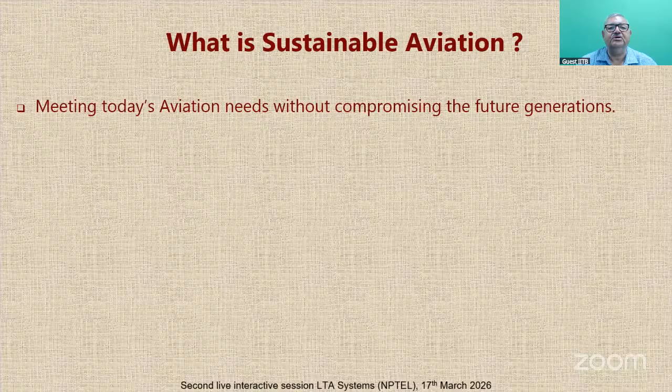In other words, sustainable aviation is achieved by aiming towards a zero carbon footprint, as mentioned by Walker et al. in 2009. So the road to sustainable aviation basically means the road towards zero carbon footprint.

However, zero carbon footprint is very far away. The initial goals in the country were 2035, but they have been pushed now to 2050. So globally, the aim is to obtain zero carbon footprint around 24 years from now.

Now, how do we do this? We focus on reducing certain aspects. One is the carbon emissions which are being generated, we try to reduce them. We try to move more and more towards renewable resources, and we also try to reduce the noise pollution.

By the way, noise pollution is a big problem, and it is coming in the way of sustainable aviation because lots and lots of communities, especially near the airports, are becoming very upset because they are not able to get peaceful sleep, or they feel terribly disturbed because of the increased aviation operations.

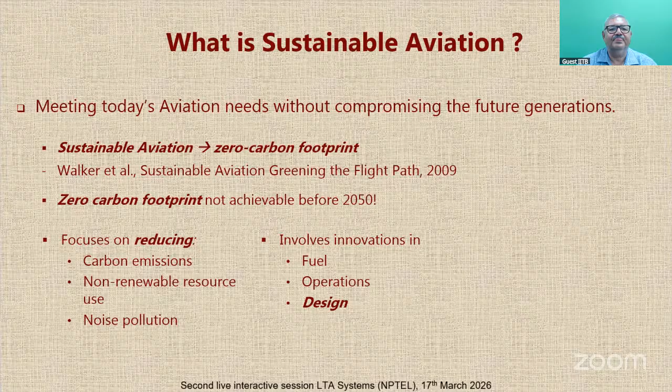Let's understand what is meant by buoyancy engineering. We are proposing that buoyancy engineering can be used for sustainable aviation. Buoyancy engineering can be phrased as creative problem solving by exploiting buoyancy for lift generation.

The genesis of buoyancy engineering is the famous, well-known Archimedes principle, which acts on a body which is partially or fully submerged in a fluid. It says that the upward force of buoyancy acting on the body submerged in the fluid will be equal to the weight of the fluid displaced.

This particular principle is also applicable to a fluid within a fluid. For example, when we boil water in the morning to have a cup of tea or coffee, after we generate heat, the air which is condensed inside the water will start becoming vapor.

And since the buoyancy of vapor, or the density of the vapor, is less than that of the fluid, buoyancy force will make it go up in the form of bubbles. So the bubbles that we create in boiling water are because of the application of Archimedes principle on a fluid such as air inside a fluid such as water.

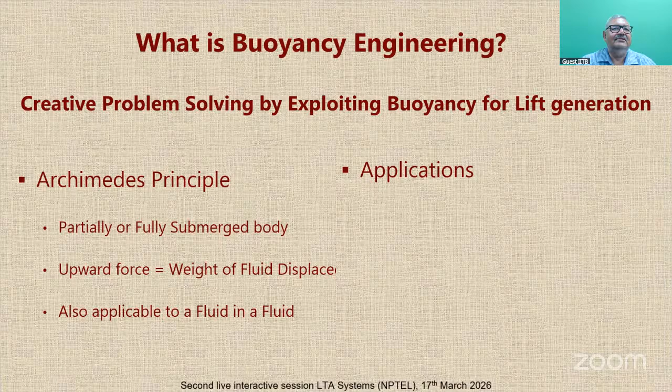Now one can apply Archimedes principle to use buoyancy engineering for beneficial applications such as hot air balloons. We are all aware how hot air balloons work. In fact, in the last session, I discussed the flameless indoor hot air balloon exercise that we do. Hot air balloons are a very well established application of Archimedes principle or buoyancy.

We are all aware about submarines also - these use buoyancy of air on bodies submerged in water. And finally, we have what is called airships, and that is what we will discuss today.

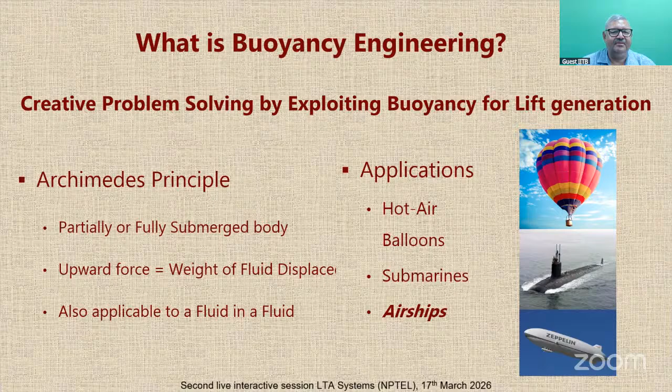The students of this course definitely know about airships a lot because we have already reached the second month of the 3-month course. So I'm sure by now you know about airships, what they can do, what they cannot do, what are their merits and demerits. So we will look now at how airships can be helpful in sustainable aviation for the future.

One application of airships, which has been touted as the best application of LTA systems in the coming years, is to use them for transporting large size and heavy cargo. But before we go there, we should first try to understand how cargo is transported today.

So today, you have an option of transporting cargo either from a ship, a train, a truck, or an airplane. These are the options available today for transporting cargo.

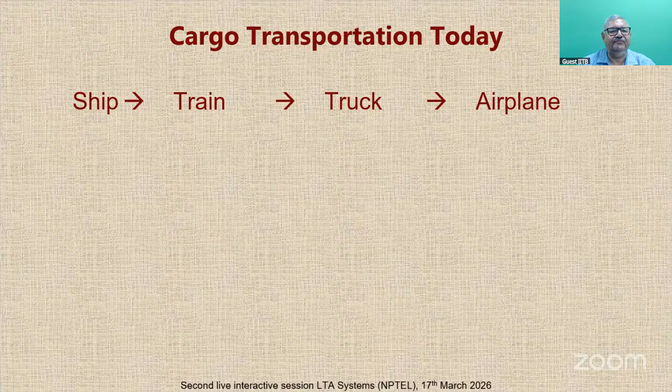Now, what does this flow represent? Basically, if you look at a plot between the cost of transporting cargo in terms of dollars per ton mile, a very commonly used unit to talk about transportation cost, so cost per ton of material carried per mile of distance, if you plot that versus the vehicle speed in knots or nautical miles per hour...

We can see in this image that the ship is the slowest but the least expensive option. The airplane is the fastest but also the most expensive option. Broadly speaking, the cost of transporting by airplane per ton per mile is 60 times more than that of a ship.

For a truck, it is 25 times approximately. And for a train, although the speed is much larger, the cost is relatively less, about $3 to $4 per ton per mile. But undoubtedly, ships are the least expensive, and that's why all over the world, heavy cargo is transported only using shipping lanes.

The current scenario in the world is such that we are in the middle of several wars. And in the Strait of Hormuz, as you all know, many ships are stuck with petroleum products, including those from our country. So we were fortunate that 2 of these ships were allowed to sail through the Strait of Hormuz.

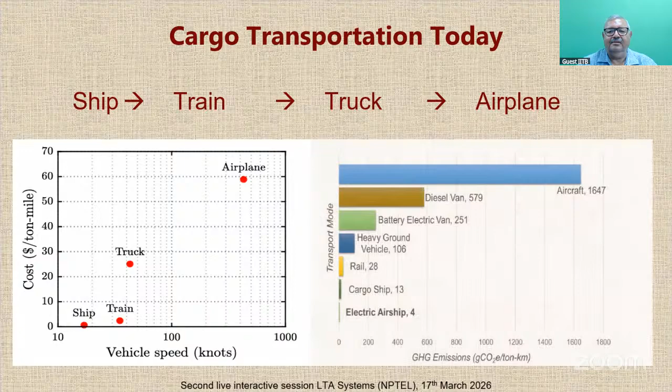On the other hand, if you also look at comparison of the transportation mode with the greenhouse gas emissions, that is grams of CO2 or CO2 equivalent produced per ton per kilometer, we will notice that aircraft has got a very, very polluting contribution of close to 1647 grams of CO2 equivalent per ton kilometer, as compared to a cargo ship which is more than 100 times less, about 13.

Rail is almost double of the ships. Heavy ground vehicles, such as the trucks which are used to transport cargo, is about 106. If we use a diesel van, it is around 580, but if you use an electrical van with battery, assuming that the battery is produced using environmentally friendly means, then it is 251.

But look at the bottom. If you operate an airship, and that too with electrical propulsion, it's 1/3 of the ship. So from the point of view of the greenhouse gas emissions, electric airship is 400 times better than an aircraft, 400 times, and even 1/3 of the cargo ship.

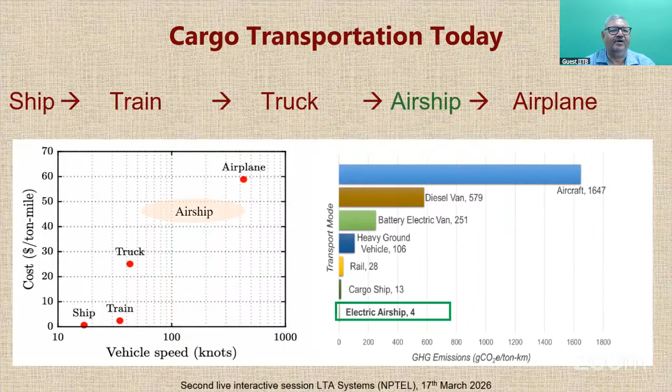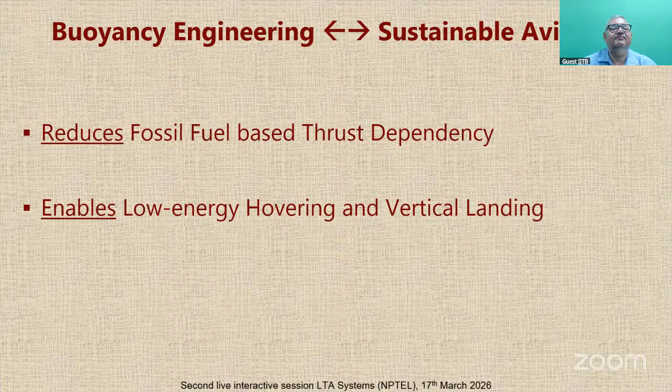So buoyancy engineering can directly be useful for sustainable aviation because of three factors. The first is it reduces the fossil fuel-based thrust dependency. Secondly, it enables low energy hovering and vertical landing, which is a unique feature of airships because unlike aircraft, unless they are fitted with a very specific kind of power plant, it is very difficult to provide facility for hovering and vertical landing. But airships can do hovering and vertical landing with lesser energy requirements.

And also, buoyancy engineering supports quiet and low emission air transportation, because I would say quieter and lower emission since they also do some emissions. I would just say it's quieter as well as lower emissions. And if we use electrical propulsion systems or hydrogen-based propulsion systems, then we can say that it is no emission or zero emission also.

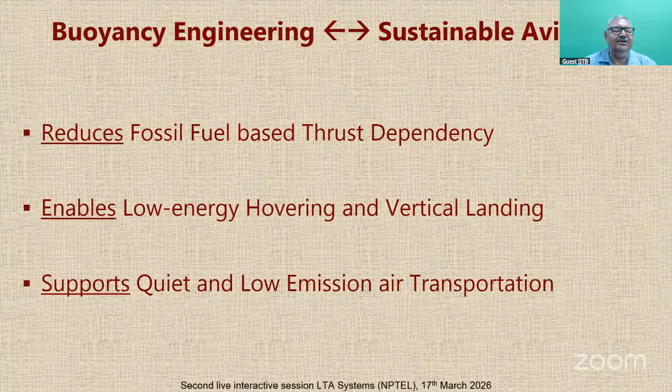But we are very far away from actually achieving a large fraction of cargo transportation using airships. In fact, right now there are no cargo airships commercially operating. They are all being proposed and they will come very soon. But they are on the road and you will see them at least, hopefully, in my lifetime.

Now, what are the applications of sustainable LTA systems? One could use them for aerial surveillance and monitoring, which is the primary use of LTA systems all over the world, and it will continue to be.

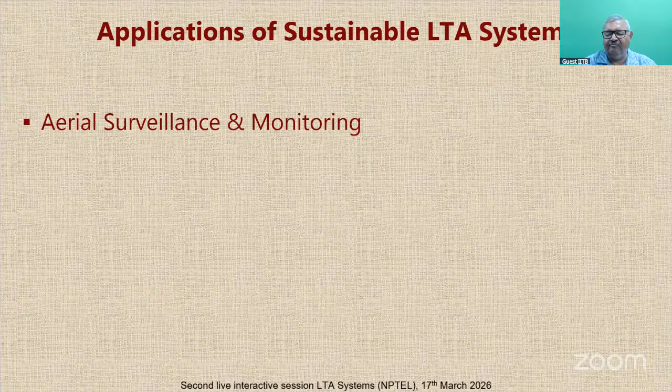For this application, if we use aircraft or helicopters or any other mode of transportation, they are very fuel inefficient. One could use LTA systems as airborne communications relays, both stationary aerostats as well as mobile airships. You can mount your communication equipment on these systems and make them stay at a place at high altitude.

Or move around at high altitude, providing a facility for airborne relay of communications. As I mentioned, you can use it for cargo transport in remote areas because at both places you don't require to build an airport or provide a runway or any other special facility. Airships can operate from open fields, so for a point-to-point transportation system, they will be very good.

Of course, we require some storage facility for the large size envelope of the airship in some kind of hangar, at least at one of the two locations or at the primary storage location. But there are solutions available even for keeping airships out in the open by anchoring them safely to the ground.

And by transporting the loads acting on them onto large pieces of fabric which are wound over the envelope, if possible. So there are solutions available. In fact, there are also inflatable hangars available now, which can be set up at a particular site temporarily and removed and relocated as the airship is also moved.

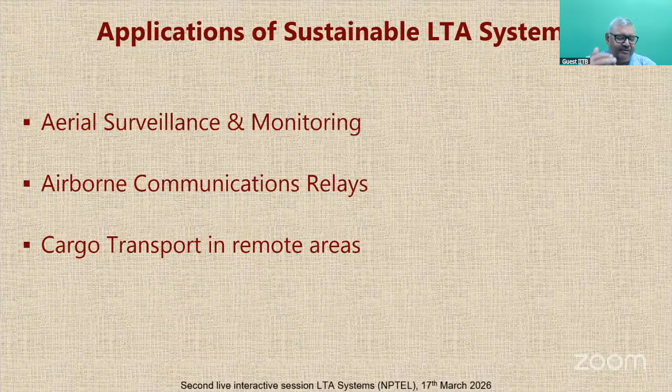Airships can also be used for tourism and short-haul passenger travel. This is the current application for which we see passenger carrying airships. Otherwise, they are mostly used for surveillance.

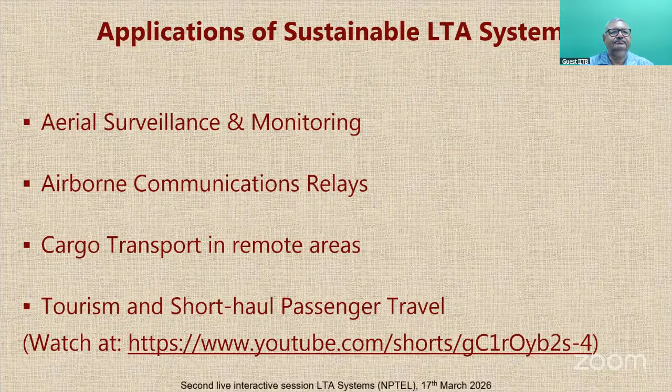Moving ahead, let us see how airships can be used for transporting cargo in remote areas. There are some concepts which have already been realized, and some concepts which are currently under a proposal stage. So first we will show you images of two concepts.

One of them, on the bottom, is called the Flying Whales. This is the concept which is under advanced stages of investigation, and if all goes well, we should be able to see them operating very soon. The one on the top is the Atlant concept of Atlas LTA, also in advanced stages of research.

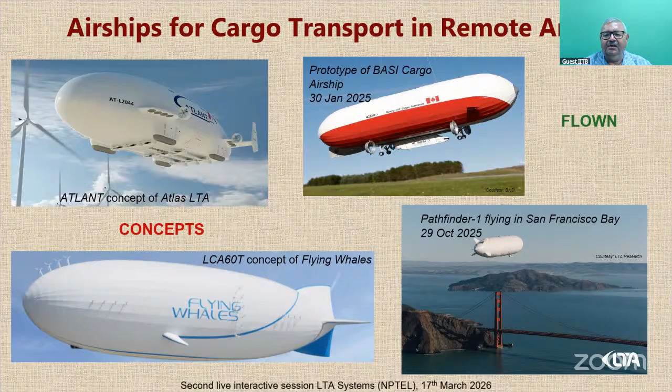On the right hand side, there are two concept prototypes. Or I should say, these are prototypes of concepts which have successfully flown. So the ones on the left are under realization, while the one on the right has already been flown.

The most interesting and promising among these is the one on the bottom, from the company called LTA Research. It's the Pathfinder 1, which you can see in this picture flying in San Francisco Bay. This trial was held last year, and every week we get updates on LinkedIn about their new developments and progress.

I'm very happy to share that some of my ex-students are working in this particular company and contributing to this research and development project. Right now it can only lift 1.5 tons of cargo because it's a prototype, but they are planning to upgrade it to around 20 tons of cargo, or maybe more, at a later stage.

The one on the top is a prototype of a cargo airship developed by my very good friend, Professor Barry Prentice, from the University of Manitoba in Canada. I'm told, unfortunately, that his prototype was damaged in a snowstorm, but it has successfully flown. This is an image from just January last year. The previous prototype he had developed was lost in a snowstorm, but this one flew successfully.

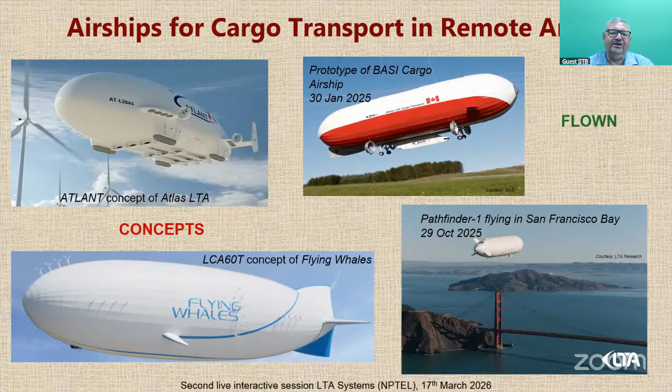So we have to distinguish that the airships being proposed for carrying cargo are probably going to be rigid airships. There are various airship configurations - rigid, non-rigid, semi-rigid. The rigid airship is most amenable for heavyweight cargo transportation. Rigid means it has a complete internal structural framework which is stiff - it could be metallic or composite - but the shape is held by this stiff internal structure.

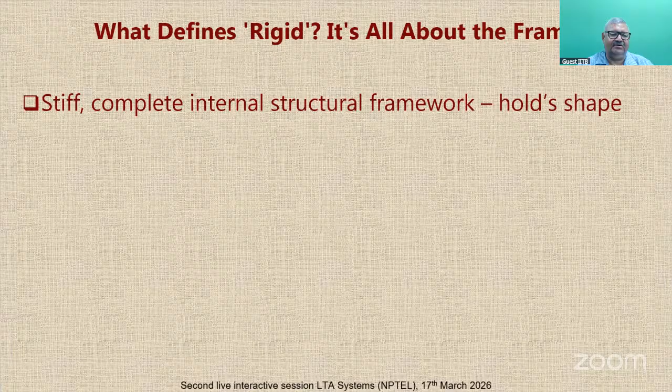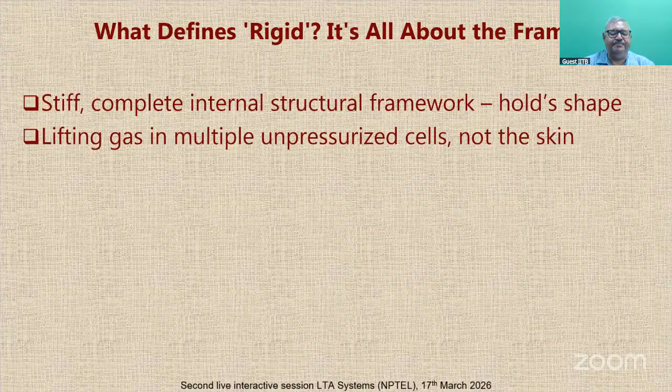Now, the lifting gas in a rigid airship is not put in one big compartment, but placed in various unpressurized cells between the various frames of the rigid airship. So the lifting gas does not come in contact with the skin of the airship - it has a separate gas bag in which the lifting gas is placed.

Here is an example of the famous airship called Hindenburg. Most people, when they hear about Hindenburg, remember that video of it catching fire at the rear side while coming into land. But people forget that several successful flights of Hindenburg across the Atlantic Ocean - more than 10 flights - were conducted successfully. I think we do a disservice to history if we consider Hindenburg a disaster or an unsuccessful airship. It is one of the most successful airships of all time. It was the last of the great airships.

Before it was lost, it had transported 2,800 passengers and had flown more than 186,000 miles successfully. You can see these gas bags which are located within the frames of the rigid structure.

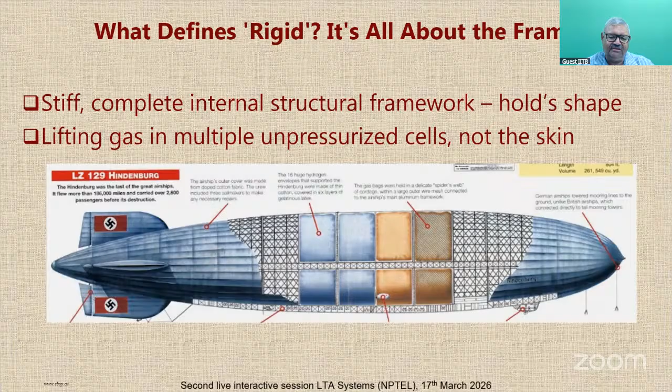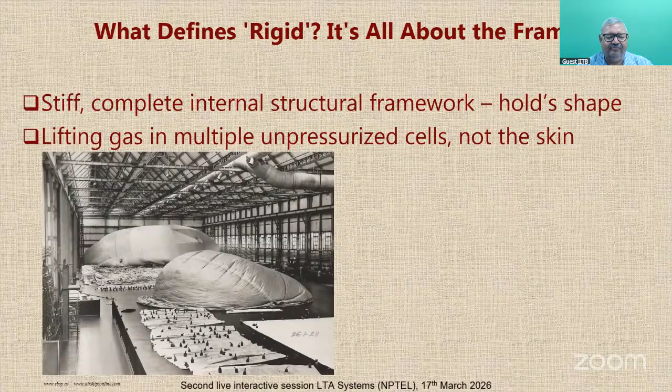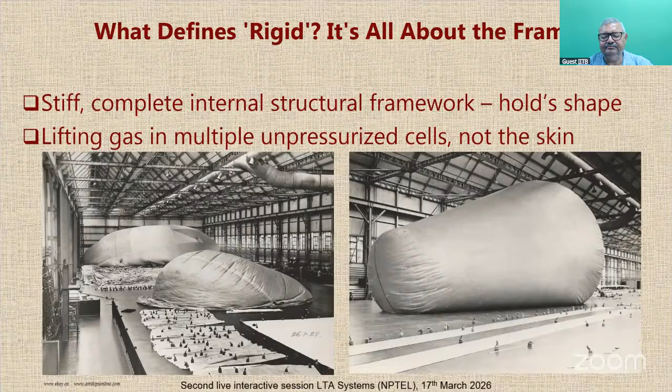The question that comes to mind is, why rigid cargo airships? Why not look at semi-rigid, which is already proven and certified? Or why not non-rigids, which are much lighter? The internal framework is very important because the loads coming on these airships will be very, very high.

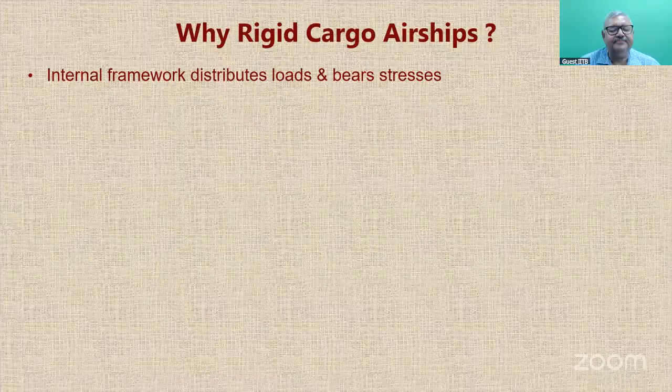We are looking at cargo airships with 20 tons, 60 tons, 100 tons payload capacity. So the load on the structure, and the stresses generated, can be very high. A rigid framework is useful because it can distribute and bear these stresses. Also, when carrying heavy and concentrated weights, a rigid structure gives higher redundancy, and it can withstand the vagaries of weather much better because of its inherent rigid structure.

Another important point is the scaling advantage. In lighter-than-air systems, bigger is always better. That's because when you increase the dimension of any body by 2 times, such as a cube, if you double the length of the cube, you get 8 times the volume, and volume is what gives you buoyancy. This is called the square cube law, where improvements multiply exponentially with larger sizes.

Because of the square cube law, you get much higher lift compared to weight when you make the airship larger. A rigid cargo airship also helps lower LTA gas leakage because the skin is not directly connected to the lifting gas. The lifting gas is inside the gas bags, and the structural envelope is separate.

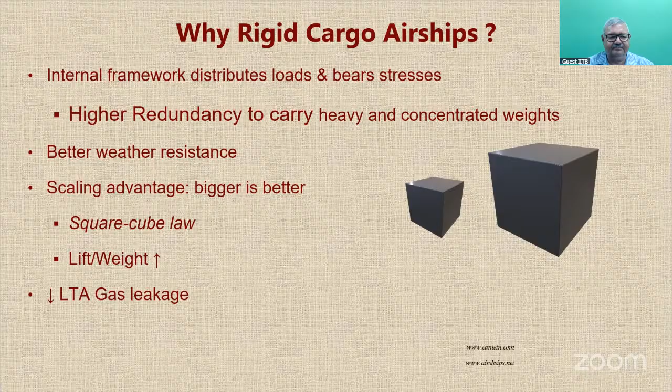Now, there are many modern innovations which have paved the way for development of much more rigid and capable airships. Earlier, we used only metallic structure for the skeleton of the airship, but now we can use carbon fiber composites, which have a very high strength to weight ratio.

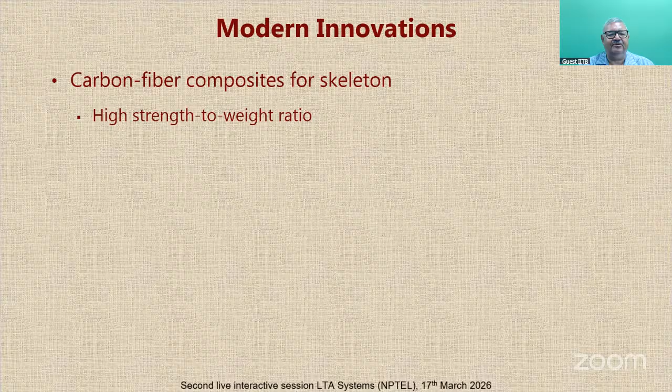Technological advancements in fabric technology have allowed us to make thin and strong gas-tight fabrics, which are polyester based. There are two main types: laminated and coated.

In laminated fabrics, you take two fabrics and laminate them together, such as Tedlar and Mylar, both proprietary items from DuPont. If you laminate them, one is very good in strength, the other is very good in gas retention.

Or you could use a nylon-based strength load-carrying membrane and coat it on both sides, one side with polyurethane and one side with polycarbonate. One side allows better gas retention, while the other side, exposed to the atmosphere, will have better resistance to atmospheric aging.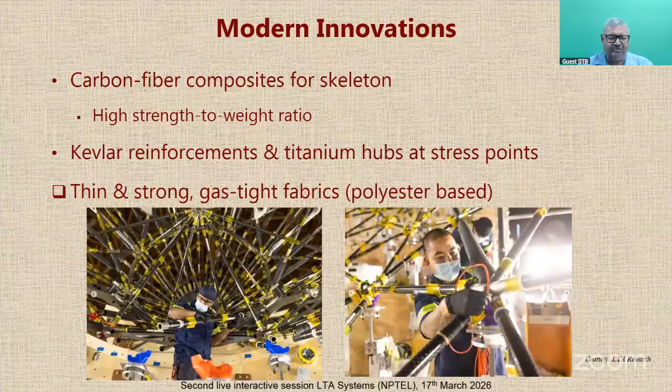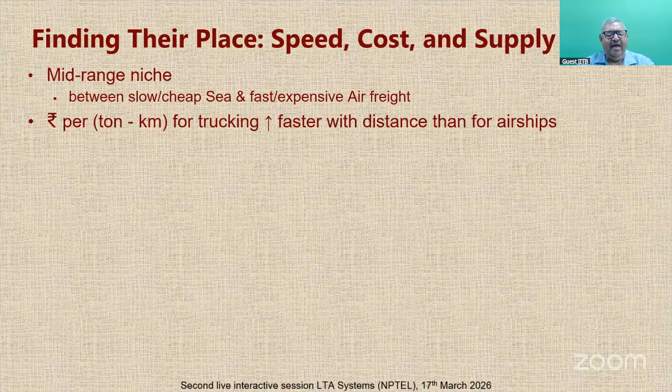Let us see how these cargo airships find their place in terms of speed, cost, and supply chains. Airships occupy a mid-range niche between slow and cheap sea freight and fast and expensive air freight. If you look at the cost in rupees per ton kilometer for trucking, it increases faster with distance, so trucking cost is more sensitive to distance compared to airships.

Airships also allow you to depend less on infrastructure. For example, you don't need a road. So these are some numbers for the cost per ton kilometer for various modes of transport at various speeds, along with what infrastructure is needed and how much time is taken.

If shipping can take 7 to 10 days for transatlantic transportation, rail and truck will not be able to do it within 3 days either. And ships, of course, are possible, but you need water.

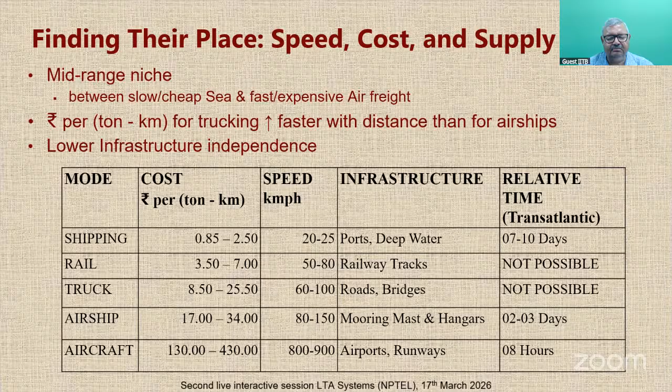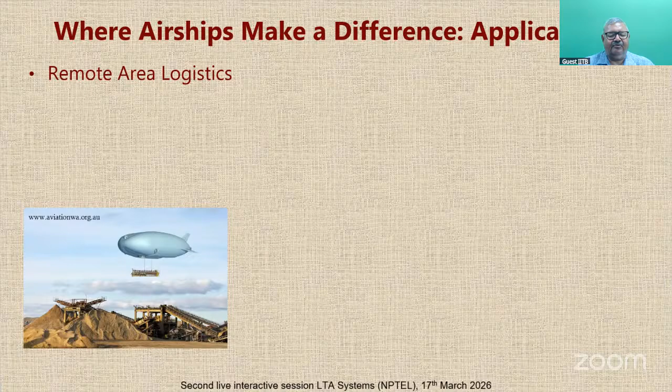So what difference do airships make? One is remote areas where you don't have other modes of transport, no roads, no development, but you want to explore and transport equipment. Those could be used by companies for their logistics.

In very cold areas, it is difficult to transport items required by the military, so the logistics of the military can be handled by airships.

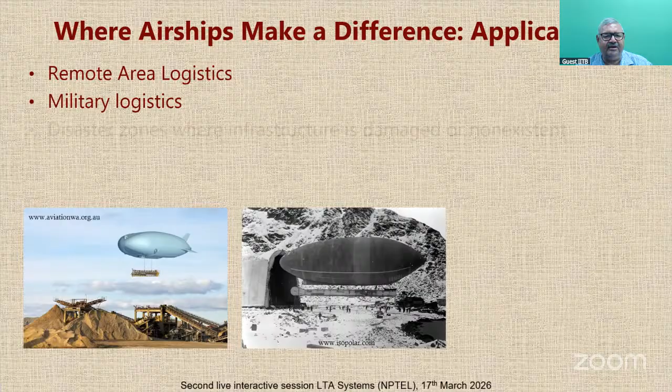We can also look at oversized loads, such as turbine blades, which are more than 70 meters in length. How do you plan to carry them on the road? You would cause road transportation disturbance.

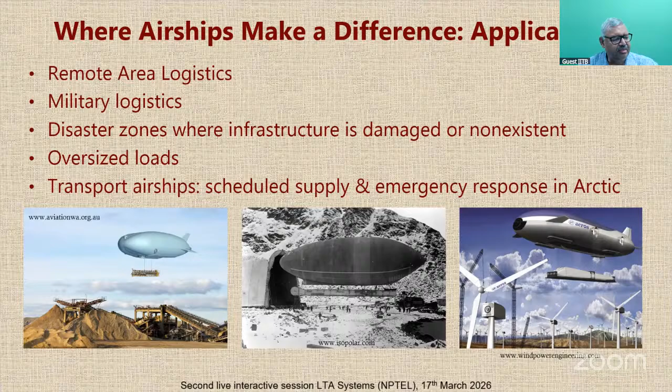Also, if you don't have infrastructure or if it is damaged, it will be very difficult to service disaster zones by other modes of transport. Transport airships can also be used for scheduled supply and emergency response in situations in the Arctic Ocean, where it will be difficult to mobilize aircraft.

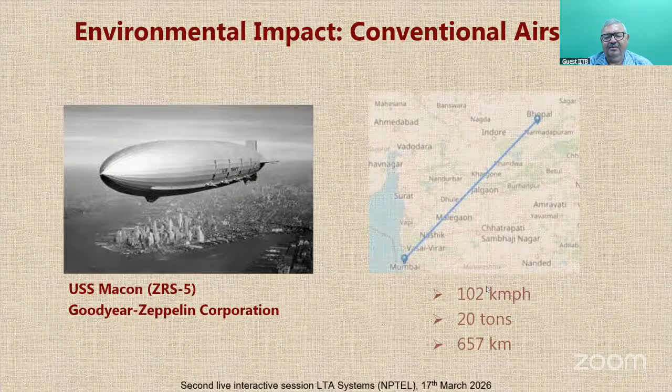Now let's look at the environmental impact of a conventional airship. Since we don't have any modern rigid cargo airships, we've taken data from an old existing airship, the USS Macon from the Goodyear Zeppelin Corporation, ZRS-5. You can see it can travel from, say, Mumbai to Bhopal in a straight line at about 102 kilometers per hour with 20 tons of cargo, covering a distance of 657 kilometers.

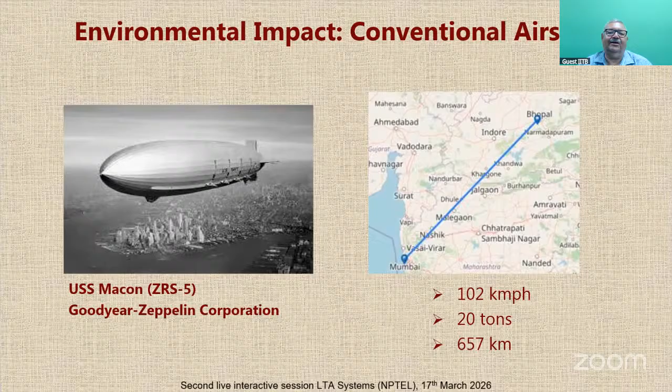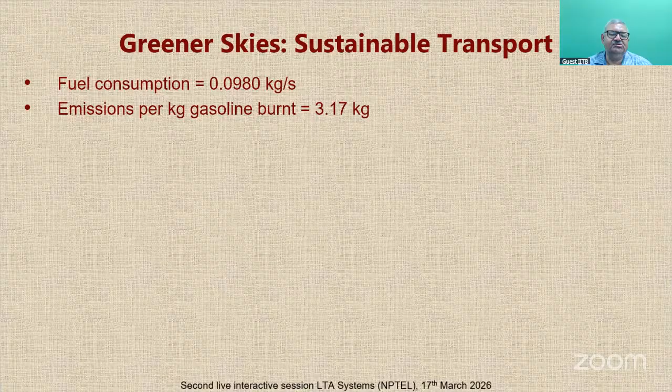Now let us see how sustainable transport can result in greener skies. If you look at the airship, fuel consumption is very low, 0.098 kgs per second, and emissions per kg will be only 3.17 kg. So the same graph comes back again with more detailed information.

We have done two studies and made one prototype. The two studies are shown in the long rectangle: the Macon with a modern diesel engine, and Macon. You can see that cargo ships and rails are the lowest, and aircraft is the highest.

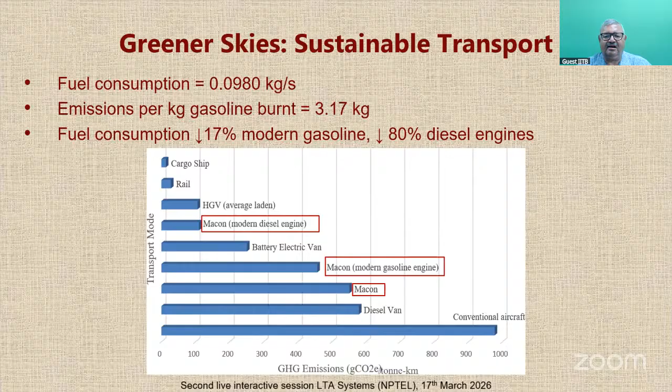Now, what happens if you bring in an electrical airship? You get improvements across the board. As photovoltaic technology is improving, we are now looking at 8.1 on our campus. 11.1 is actually a very large value, and already we are looking at 8 or so.

Low carbon hydrogen is also another way of minimizing, but not eliminating, emissions. There is also something like route selection. Between Barcelona and Valencia, we have chosen some route and transported some items.

But the question here is that none of the existing models or codes are actually very good for this particular application. This I've already shown you, so I don't want to repeat. I just want to highlight that an electric airship will be about 400 times less polluting than an aircraft.

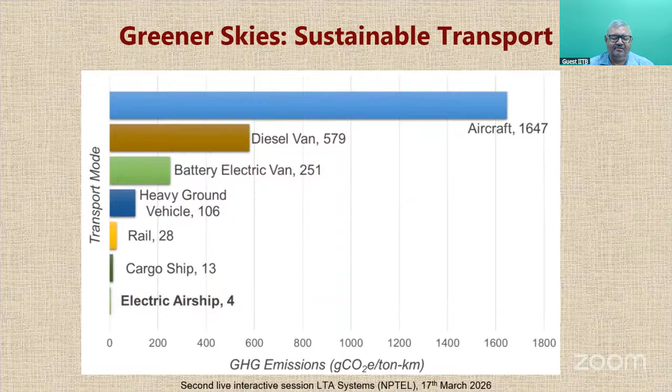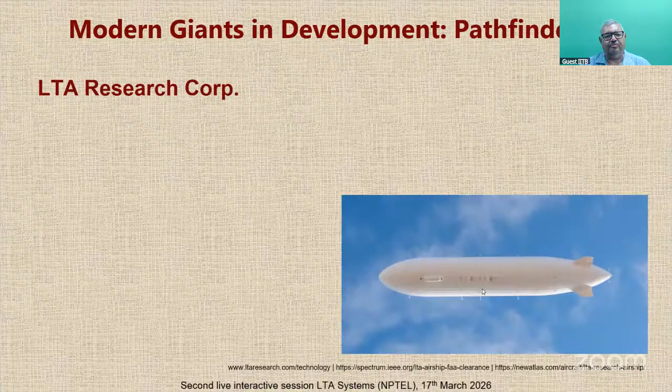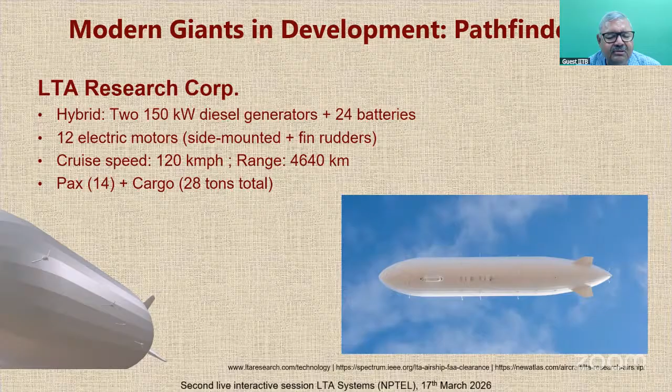This particular airship today can cruise at 120 kilometers per hour and travel 4640 kilometers. That is the ultimate aim for the range. This is not what Pathfinder 1 does, because that is a prototype. This is what they want to achieve with an airship based on this prototype — they want to carry 14 passengers and 28 tons of cargo.

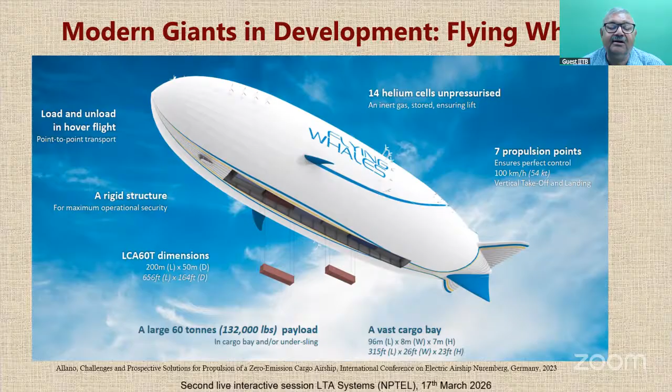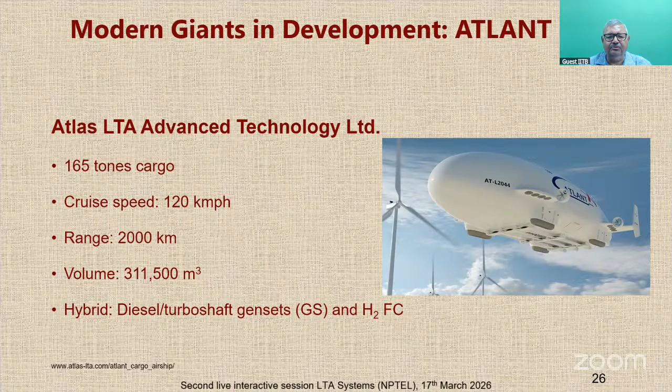So they have gone for certain studies related to hybrid engines, diesel and turboshaft. If they come to a conclusion, fine. If not, then we will fall back to the sponsoring agency to do this project. But the gensets here are diesel and hydrogen fuel cells.

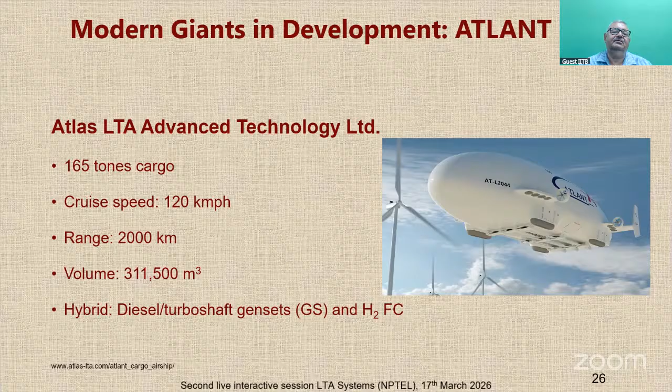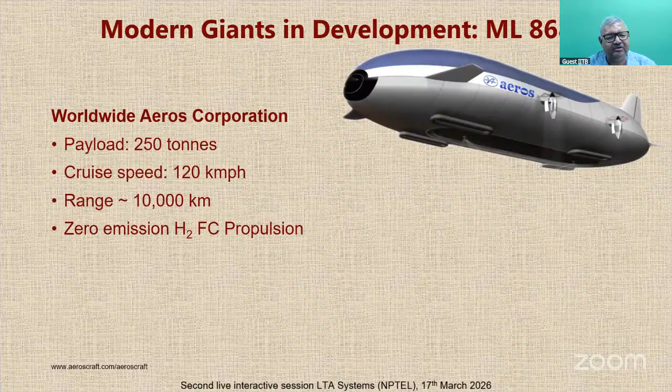This aircraft is supposed to carry 250 tons of payload, fly at 120 kilometers per hour, over 10,000 kilometers. They have made a prototype, and they claim it does all these things, and they would like to do a demonstration.

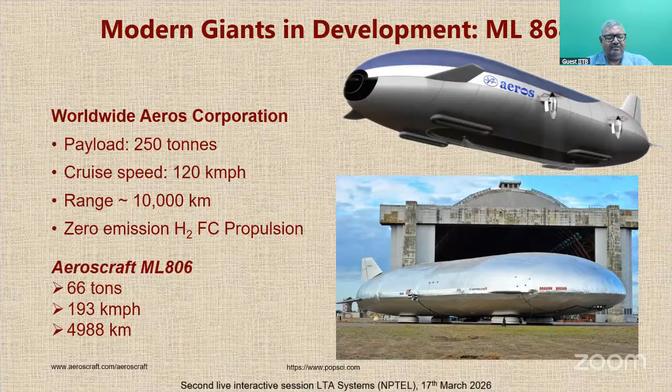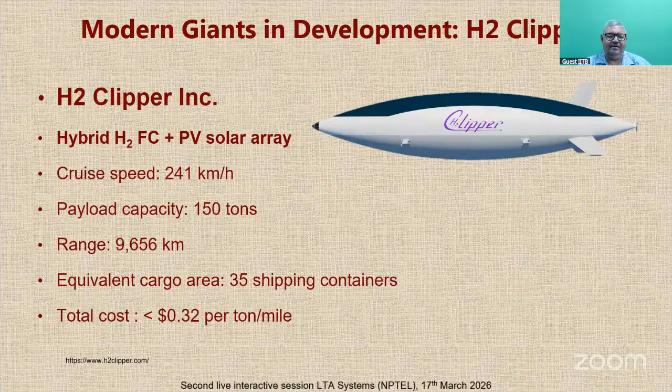We don't know exactly, but this is what they claim — that the area we are going to occupy is equivalent to 35 shipping containers, and the total cost of operating this particular cargo airship comes to 0.32 per ton-mile, as per their estimate. Then we have from Russia a project called A600.

This is a lenticular rigid airship. A lenticular shape essentially is a shape that remains like a disc.

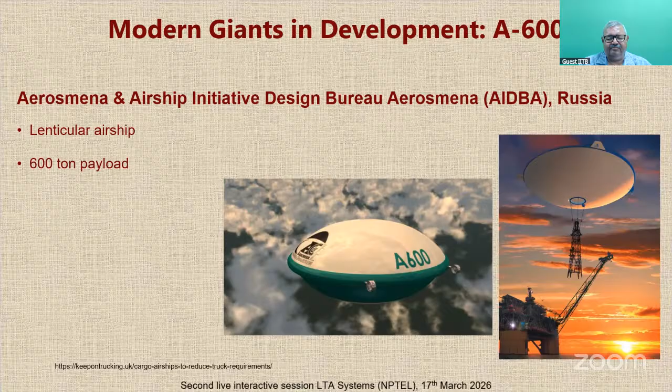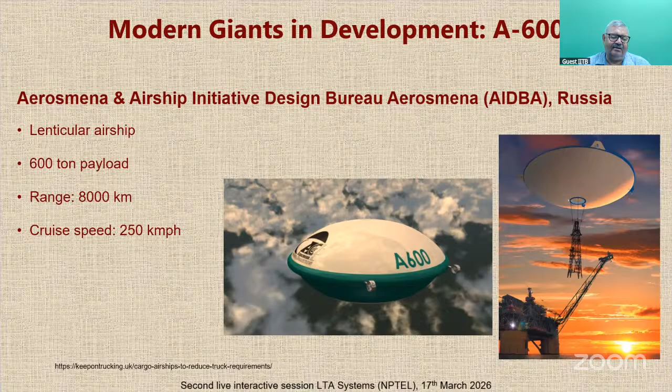So their idea is that the central portion will have the power plant, and you can use it to attach large cargo like this electrical tower component, take it to the place and do an in situ fabrication. They are aiming for 600 tons of cargo. I don't know whether they'll achieve it. They're aiming for a range of 8,000 kilometers.

And they are looking at us to provide them the solutions for the turbo machinery related aspects of these aircraft. Now, that was all I wanted to talk to you about sustainable aviation. We will now move on to some questions which have been asked by the learners on the discussion forum.

One general question by Gudi Metla Nagaraju is, how can students prepare themselves for careers in aerospace research and industry? My simple answer is that by making your fundamentals in aerospace engineering strong, and if needed, you can supplement them with courses on NPTEL. That is how you will be able to acquire a level of competence due to which a company dealing with aviation products will be happy to hire you. So, equip yourself well. That is what I would like to say.

In our Google form, there was an option given for people to have a separate interactive session with me to learn more about aerospace research and industry experience. I only want to make a statement that there are more than 880 learners enrolled in this course, of which 265 have also registered for the examination.